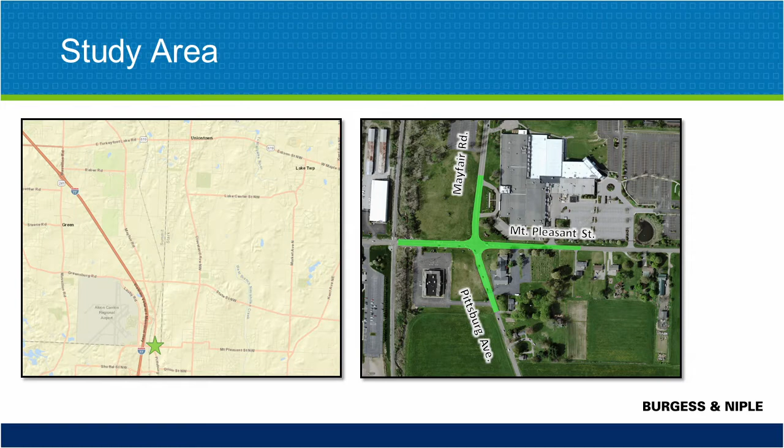Diebold is located at the northeast corner of the intersection. Mount Pleasant Church of the Brethren is located at the southeast corner of the intersection, and Area-Wide Protective is located at the southwest corner of the intersection. The northwest corner of the intersection is currently vacant.

In 2013, the SCATS Transportation and Land Use Study was completed to identify land development trends and potential improvement areas to increase capacity of vehicular traffic. This study identified the intersection of Pittsburg Avenue and Mount Pleasant Street as a risk for congestion when development was completed. Since this study, development of the ComDock site, as well as preparations for the Redwood development, have verified the predicted development and that the intersection will need to be improved to maintain the efficient flow of traffic.

In 2017, this project received funding due to increased congestion. The CMAQ funding, or Congestion Mitigation and Air Quality Improvement Program, will cover 80% of the intersection improvement construction costs. In 2020, a feasibility study was completed by Burgess and Niple to identify how traffic growth and congestion could best be addressed. The study found that the intersection can expect a 10 to 15% growth in vehicular traffic over the next 20 years.

Intersection improvements are needed to handle the expected growth in traffic volumes through the intersection. If improvements are not made, the intersection is projected to operate with poor levels of service in the peak hours, resulting in long delays for motorists. This is a result of traffic volumes exceeding the capacity of the intersection. A roundabout is a great way to increase capacity while adding efficiency and safety.

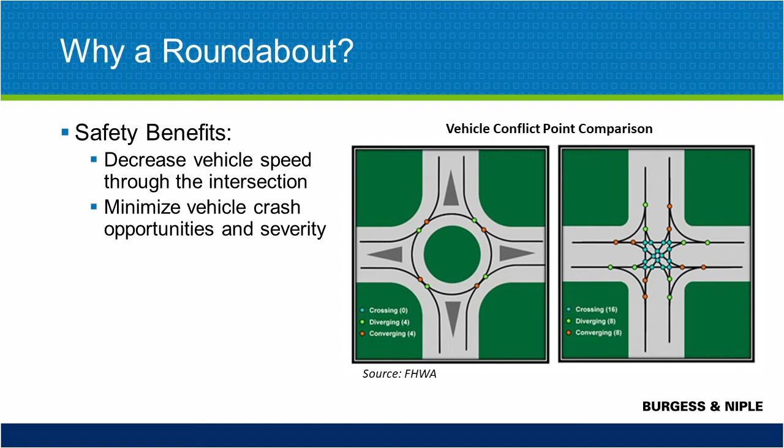Roundabouts increase efficiency by allowing a continuous flow of traffic. Vehicles entering the roundabout must yield to traffic already in the roundabout, but are not required to stop if the roundabout is clear. At this intersection, a roundabout can better accommodate expected increases in traffic volumes with shorter delays when compared to a signalized intersection with additional lanes.

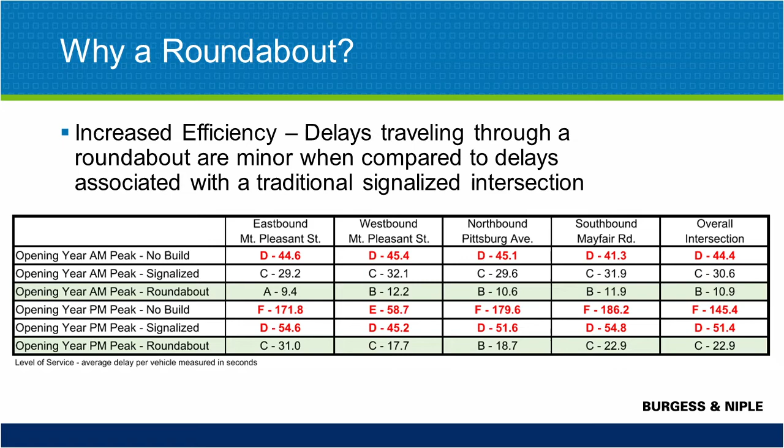The information contained in the table shows that the existing intersection operation will fail if improvements are not made. Adding turn lanes and retiming the traffic signal would improve the level of service, but the intersection would still operate at a level of service D in the PM peak hour. The rows highlighted in green show the anticipated level of service for the roundabout option being proposed. The roundabout will operate with a level of service C or better during the peak hours based on the opening year traffic volumes.

The project is not anticipated to have any significant impacts. Retaining walls have been included in the proposed layout to minimize impacts to adjacent properties. Minor amounts of permanent right-of-way will need to be acquired from properties adjacent to the intersection. Minor temporary acquisition will also be needed from adjacent private property owners to allow for construction. Affected property owners will be contacted at a later date to discuss the right-of-way needs, the acquisition process, and the property owner's rights under that process.

It is anticipated that overhead and underground utility relocations will be required prior to construction of the roadway improvements. The project will be constructed in multiple phases. When an approach to the intersection is closed for construction, detours will be posted to guide motorists around the closure.

An evaluation of the corridor for historic and archaeological resources and the project's effect on any such resources has been undertaken as part of the environmental review of the project area. At this time, there are no properties within the corridor that are listed on or known to be eligible for the National Register of Historic Places. The project is not expected to impact any waterways, wetlands, or other habitats of protected species. The project is not located within a designated special flood hazard area and will not increase the risk of flooding.

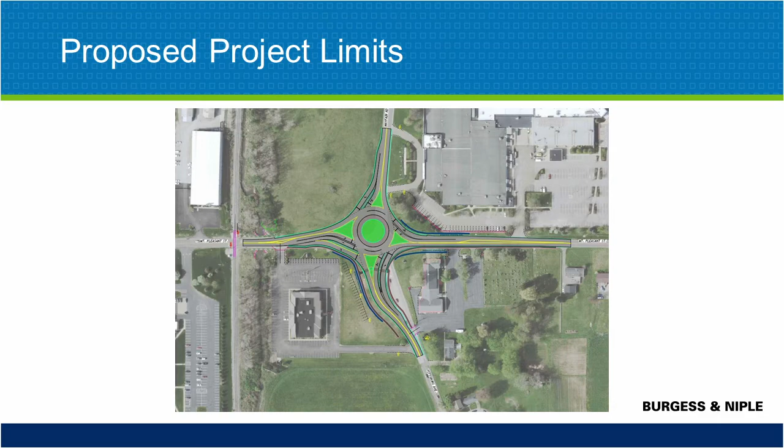The proposed project involves reconstructing and converting the intersection to a modern multi-lane roundabout as seen on this graphic. The roundabout displayed here is sized to meet projected traffic volumes in the opening year of 2024 and for several years to follow. The right-of-way acquisition, retaining wall construction, and project grading will be designed to accommodate additional lanes if they are necessary in the future. A copy of this graphic is available for download from the county engineer's website.

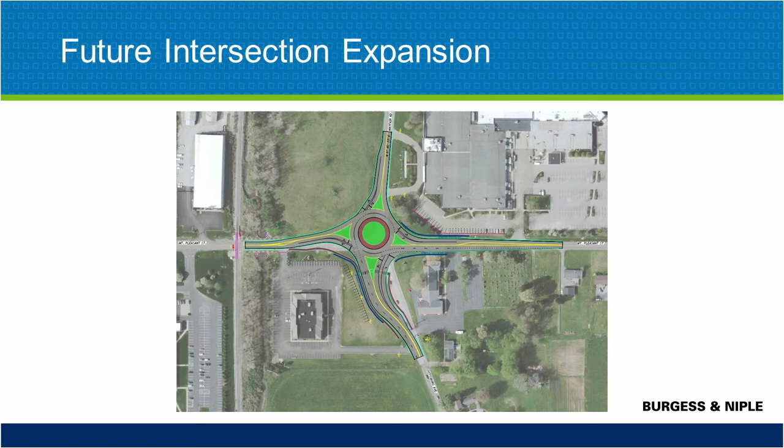This graphic shows what the intersection could look like in the future if traffic volumes continue to grow as outlined in the feasibility study. Additional exit lanes have been added on the south and east legs of the roundabout, and the west approach has been increased from 2 lanes to 3 lanes. These modifications could be completed with little disturbance to traffic flow and with no additional retaining walls or right-of-way, allowing for a highly efficient intersection for many years. A copy of this layout is available for download from the county engineer's website.

Traffic in a roundabout flows counterclockwise around a center island. There are no traffic signals or stop signs in a roundabout. Drivers entering the roundabout yield to traffic already in the roundabout. Follow these steps to safely navigate a multi-lane roundabout. 1. Slow down when approaching the roundabout. 2. Look for pedestrians as you approach the roundabout and yield to any pedestrians in the crosswalk before entering. 3. Yield to circulating traffic when entering the roundabout.

4. Enter the roundabout to the right and continue to drive counterclockwise to the right of the center island. 5. Do not stop in the roundabout. And 6. Look for pedestrians and yield to any pedestrians in the crosswalk before exiting the roundabout. Here is a short video created by the Ohio Department of Transportation with tips on how to drive a multi-lane roundabout.

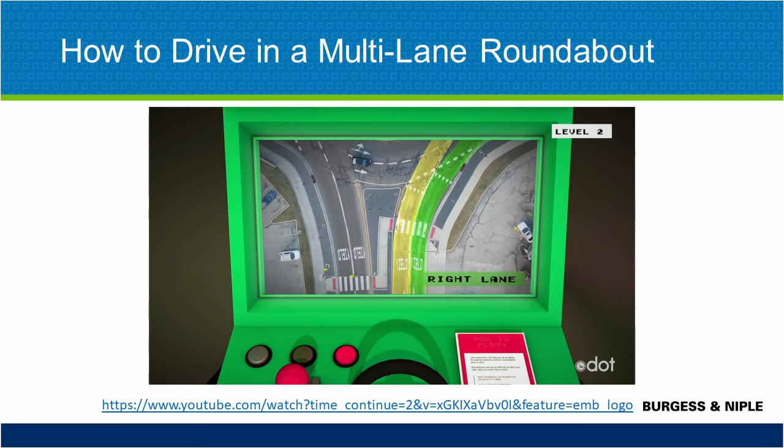Level 2, multi-lane roundabout. Let's take it to the next level, multi-lane roundabouts. With multi-lane roundabouts, it is very important to check the signs in order to choose your lane before entering. But which lane do you pick? It's the same process as with a traditional or square intersection. You choose your lane based on where you want to go. At this roundabout, if you want to turn left or go straight through, you'll want to be in the left lane. If you want to make a right turn or go straight through, pick the right lane. Do not try to turn left from the right lane. Remember that each roundabout is different, so always check the signs.

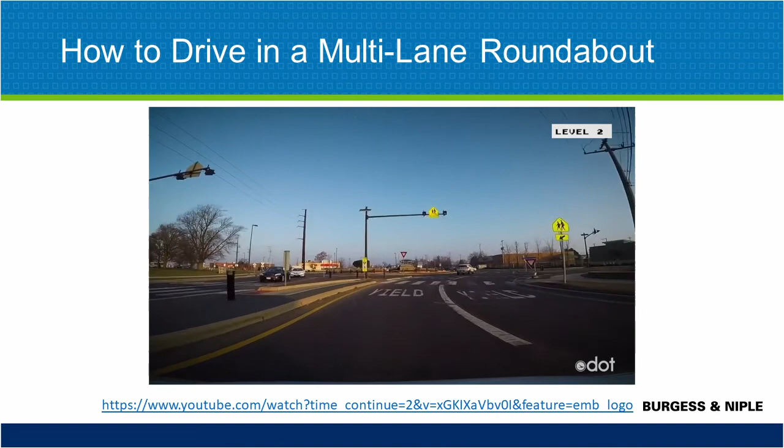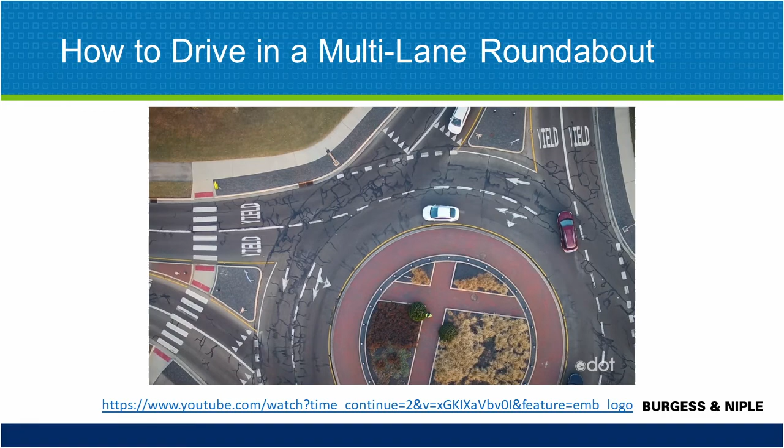After choosing your lane, check for and yield to pedestrians. Then proceed to the yield line. Look to the left for oncoming traffic. Once there's a gap in the traffic in both lanes, enter the roundabout and maintain your lane as you travel through it. As you prepare to leave the roundabout, be sure to check for pedestrians again and continue on your trip.

Pedestrian accommodations in the form of sidewalks and ADA-compliant curb ramps will be included in the project. These improvements qualify for transportation enhancement funding. The sidewalk improvements and associated costs will be 80% covered by this funding, up to $300,000. Construction is currently scheduled to begin in mid-2023 and will last approximately 1 year.

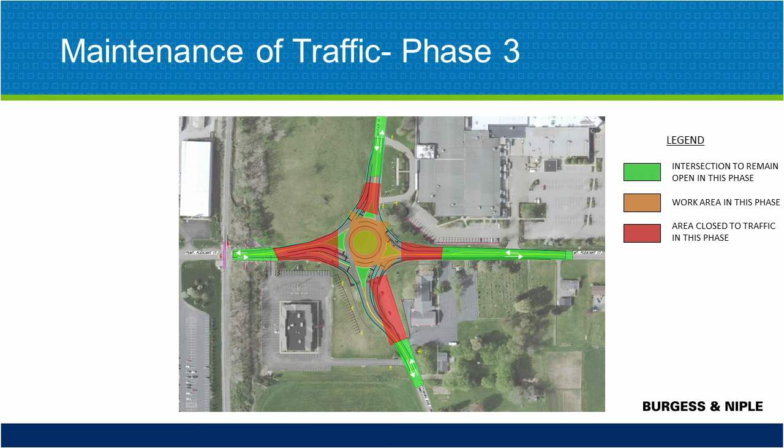The third phase of construction is the shortest phase and will last approximately 1 month. During this phase, the intersection will be fully closed and the center island of the roundabout will be constructed.

At the start of the fourth phase, the intersection will be reopened to eastbound and westbound traffic on Mount Pleasant Street. During this phase, the north and south legs of the intersection will be closed and reconstructed. The anticipated duration for this phase of work is 8 weeks. Following Phase 4, the roundabout construction will be completed and open to traffic.

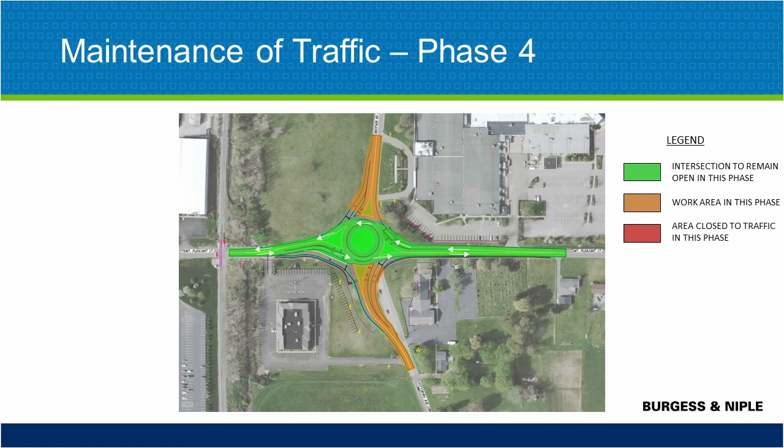Will the county need to acquire more right-of-way to build these improvements? Yes. Both temporary and permanent right-of-way will be required to construct the project. Permanent right-of-way is needed for construction of the roadway, pavement, and retaining walls. Temporary right-of-way is needed for temporary pavement, adjusting driveway aprons, minor grading, and to provide the contractor with room to work when constructing the roundabout and retaining walls.

A graphic showing the anticipated temporary and permanent right-of-way is included in the public meeting documents available for download from the county engineer's website. What is the right-of-way acquisition process? Property owners will be compensated for permanent right-of-way acquisition and also for temporary use of their land.

As plan development advances and the exact needs are determined, Stark County will hire an independent state qualified appraiser to determine the property value of any land that is either temporarily or permanently needed to build the improvements. As required by law, a second independent appraiser will review the first appraiser's work to verify that it is fair and reasonable. After the appraisals are finalized, the right-of-way negotiator will begin contacting property owners to start the acquisition process. Affected property owners will be contacted at a later date to discuss the right-of-way needs and property owner rights under the process.